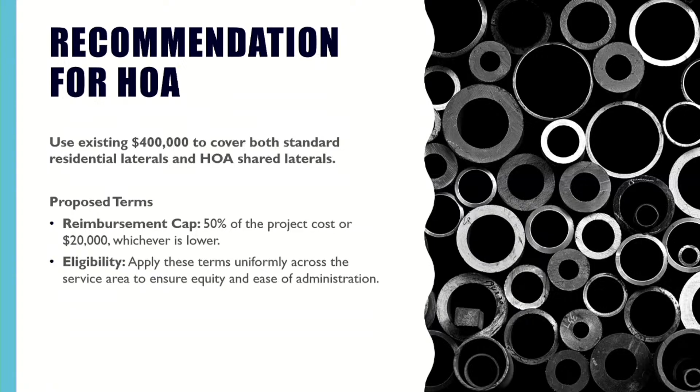That is our recommendation, and we look forward to hearing any feedback you have. Okay, thank you so much for the presentation.

Director Antila: I do have questions. First of all, on HOAs, there are two different types - one owned privately by a land developer, and one that's on city property. Are you drawing a distinction between the two? Response: We don't have a distinction identified for the different HOAs. If they submit an application to us, we'll review it, but this usually accommodates the property owner, so we'll have to see if there is a different path that needs to be taken. Right now we just identify it as shared laterals HOA, but we don't have a differentiating response.

Just pointing that out because the city of Richmond has a street sweeping program, and they don't street sweep in privately owned HOAs. Oh, okay, so I was just curious about that.

Is there contact information for people interested in the PIPES program? Yes, it's the same PIPES information for residential, but I forgot the phone number. We have Armando Hodge, our engineer in planning and support services, who also manages the PIPES program. Armando, can you share the contact information? He does a lot of work on the PIPES program, so you should probably talk to him as well.

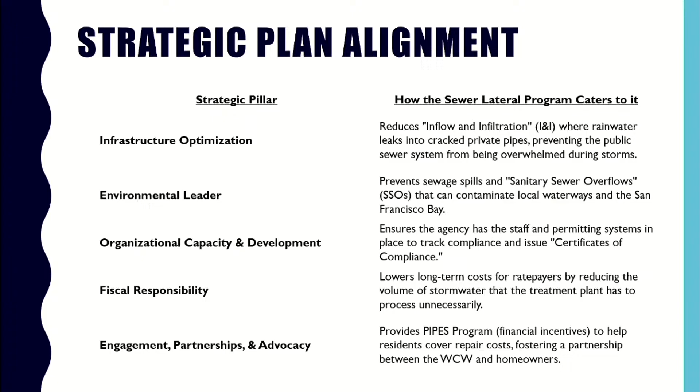Actually, yes, just so we can see the breakdown again. Happy Cinco de Mayo, by the way. That's right, Cinco de Mayo.

And in order to get that rebate, does it have to be done by a licensed contractor? I mean, a homeowner can't do it themselves - they send that information to us and we'll reimburse. Okay, yep.

One second, Angela, Armando. I thought we had in our PIPES program where the homeowner could do some of the work themselves. Is that in there? Oh, sorry. Okay, I thought it was licensed, sorry.

Yeah, owner-builder, but I think they have different requirements - they have to get quotes from contractors still in order to justify the price.

There we go. Thank you. Thank you for that clarification. All right.

I'm here for another. Okay, next item, please. Public comment? So, yes, before we move on, we need to ask if there's public comment on item 2, the PIPES program update. If anyone has any comments, please approach the podium or raise your hand in Zoom. Seeing none, we can move on to item 3. All right, thank you, next item.

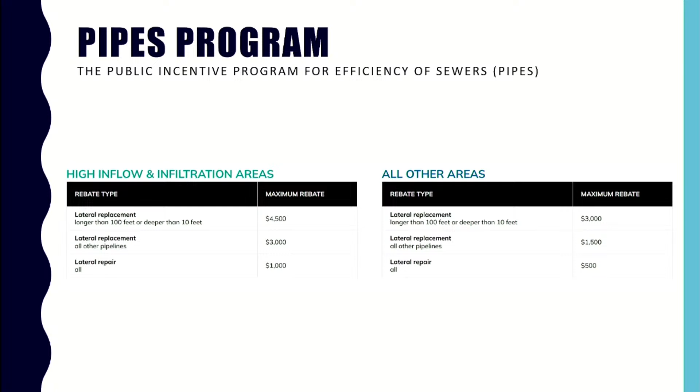Angela Andrews will give us a brief presentation on the AQPI initiative. You get a gold star if you could say it 5 times fast. I hope you begin with a nice, detailed explanation on what this is. It's going to, give me 1 second. Okay. While you're doing that, I'm gonna get some water, but you can continue. Okay, I'll listen while you do that.

Do I need to do anything with the remote? Oh. I could talk about it, won't be as fun.

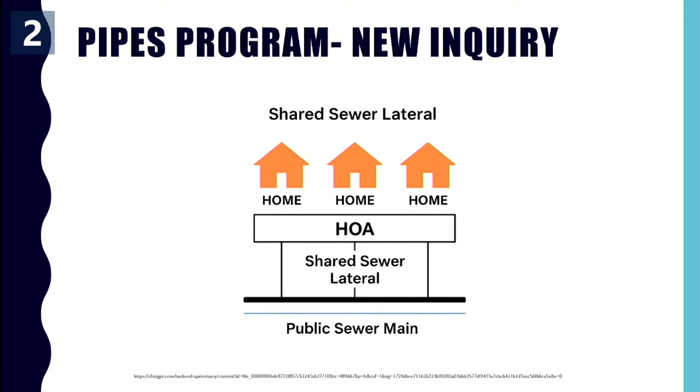Maybe you have to take this to the full board in order to vote to agree to having that. Okay, HOAs, we are ready. Here's a presentation to the board.

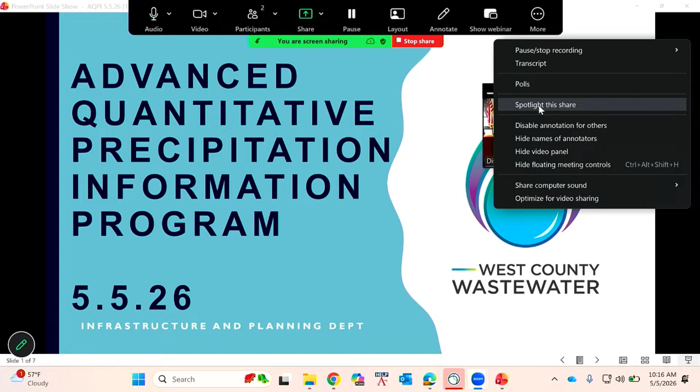So today I'm presenting on the Advanced Quantitative Precipitation Information Program. It's about weather, you guys. That's a more complicated way of saying it. We're trying to predict the weather.

So the AQPI program uses a network of radars that are throughout the region, and we're trying to have a better estimate or measure for rainfall. So this will help during the strong rainstorms that we're seeing so we can prepare better for emergencies.

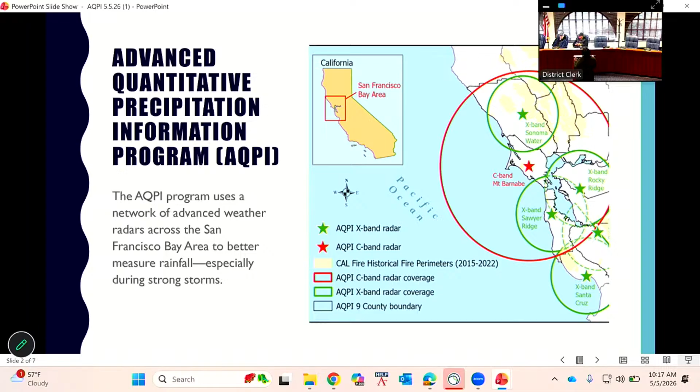And this fills in the gap for traditional weather coverage. It gives us more timely data, and then it helps us for flood readiness and emergency response.

This is a collaboration throughout the region, and it's one of the reasons we wanted to participate. It's part of our strategic goal of being more collaborative with regional partners and neighboring agencies. There's a team of local governments participating, led by the Sonoma area, with emergency managers throughout the region looking at this data. It also includes water agencies such as ourselves, and different communities throughout the Bay Area will also be participating in the AQPI project, with more partners continuing to be added.

I can give you a breakdown of who they are. It's being led by Sonoma County Water Agency, with a lot of support from East Bay Dischargers Authority. Sonoma, SFPUC, and Santa Clara Water are putting in the lion's share of getting this program off the ground. Us participating actually helps reimburse Sonoma for some of the initial costs they had to contribute to start the project. But you can see there's a lot of folks interested in getting this information.

Hold on, let me do the first one. Is it working now? Still no? There we go. Oh, there it goes. Okay.

So some recent milestones that we've been able to reach. We've completed our remaining shutdowns at the headworks. Some testing - if you go up there now, you'll see a lot of construction around the headworks area. Essentially what we're doing now is we're going to start installing bypass piping.

So Andrew talks a lot about some of the auxiliary projects that come from this project that will benefit staff and organization in the future, and this is an example of that, right? Due to the cost of bypassing that system, Aptera is going to build us a bypass that we'll be able to keep forever. This is a pretty substantial piece of infrastructure they're building there, using some really innovative techniques and equipment that, for us, would probably be 30-40% more in cost if we were to do this on our own. So we're actually saving money by getting additional infrastructure that we normally would not be able to do, or even thought about doing at the beginning of this project.

So essentially, they're building a bypass. That bypass system will allow us to bypass our entire grit system into our wet well. So in the future, when our staff are doing maintenance of our headworks, of our new grit system that we're installing, they're able to do it without being in confined space. They're able to do it in a more safe manner, and we're able to maintain our system during that time.

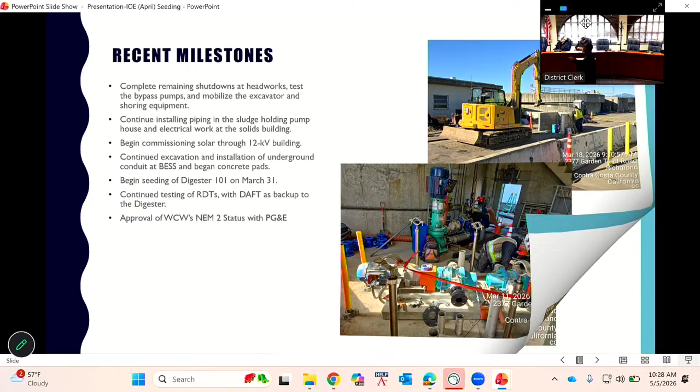Okay, startup continues for the RDT. I told you we had some issues. They're performing as expected, but there's some backups inside the line, clogs. We think we found out that it was the manufacturer of the polymer, not really the equipment itself.

So we're running a new polymer. I want to thank Andre at the plant. He did a great job working with the last company, and we decided we just need to part ways and go with a different company. We were able to do that, and so far, so good, and actually it's a little cheaper polymer.

The backup, we installed a backup line as a change to the project in case the RDT did fail. That is in place to feed the new sludge inside of the digesters in case we have an issue with RDT. So we gave ourselves a little security blanket in case we have an issue, so we can continue to seed our digesters and get them commissioned.

The 7-day test, this equipment will be accepted after a 7-day test. We're going to wait on that until we start seeding digester number 2 to start the 7-day test, and we're just going to use the seeding of digester number 2 also as a test to make sure the RDT is functioning correctly. I want to thank maintenance and operations for their help with that.

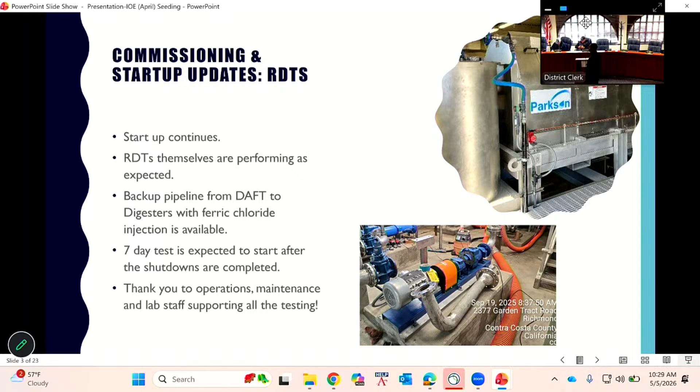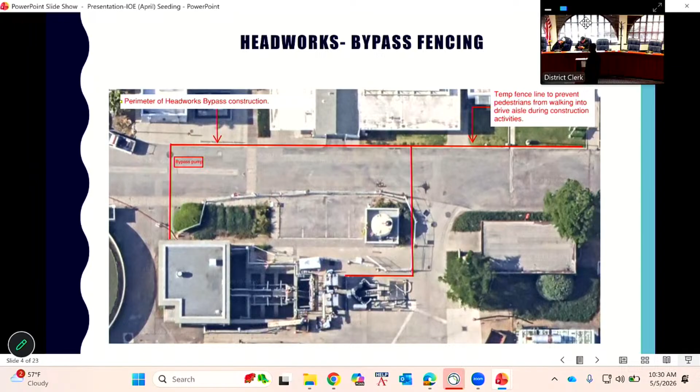Okay, let me go here. And then commissioning schedule, seeding 101, like I said there. 102, we just discussed that today and agreed today that Monday will be the day we start seeding digester 102. Centrifuge will follow that. So we're looking at late May, early June for centrifuges to be done.

At that point, we'll be at a Class B biosolids, and then at that point it'd be West County's responsibility to transport the sludge out off the site. We're currently looking at probably mid-June for that to be the case. Until then, Optera is still paying for the transportation of sludge off-site.

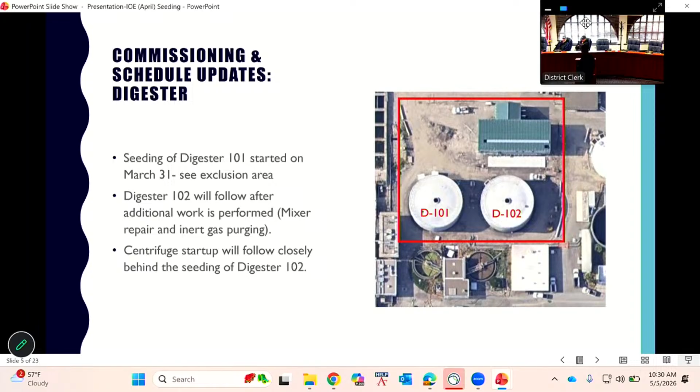I thought these were some good slides to add here, just to talk to you guys about digester methodology and what we're doing as we're seeding the digesters. I'm going to go pretty quick about it, but the primary purpose of the seed - we have an anaerobic digester. We add in biology, which is the main driver inside that will create the gas we will use to create electricity here at West County.

What we've been able to do is seed our digesters from the City of Richmond using their spent sludge, and then we're adding it to hot water inside of our digesters here at West County. So we're getting something that's like 1 or 1.2% solid, and we add it to pure water, right? So it takes time. So far it took about 30 days or so for us to get to a point where we're comfortable with the digester, because we're diluting it with water.

We have to do that because we have a new type of mixer, right? It's kind of a plunging type of mixer, and we have to keep a water line inside of the digester. So we have to keep it with water, and then we're adding the sludge in on the backside.

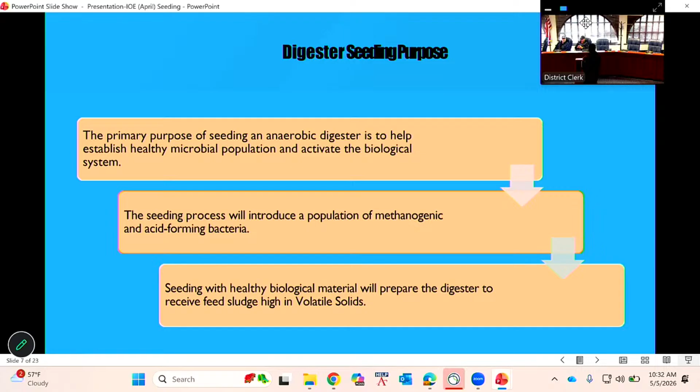We added roughly 300 and some odd thousand gallons of water and sludge from City of Richmond over a 5 or 6 day period. There was one period inside of the 30 days where we were very scared about the pH balance inside of the digester, so we added some more seed to support the biology inside of the digester. But other than that, it's been running very well. We're above a 6.8 pH, which is where we want to be, between 6.8 and 7 pH level inside of our digester.

Let me go to the slide here. Our alkalinity goal is to be between 2,500 and 3,500. Right now we're about 2,100 and going up rapidly, like 100 milligrams per liter a day over the last week. That's why we're comfortable with starting seeding next week for digester number 2. Our concentration is on the lower end, about 80, and that's fine. Not too bad of a number, but we're within range, and that's the most important thing right now. As the digester matures, that will grow up over time.

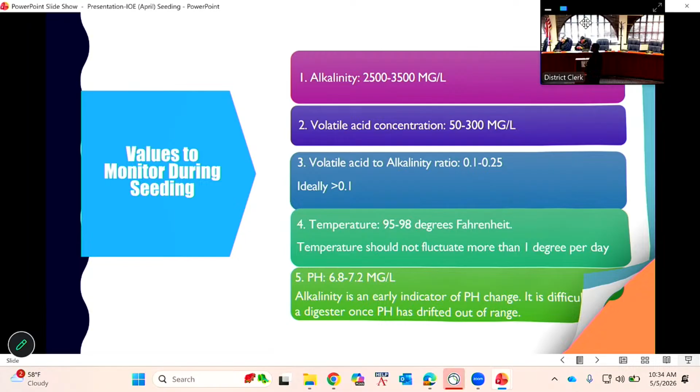On adding chemistry, like I said earlier, we've been increasing the rate. We started at a 15% rate, which is basically 15% of the sludge that we create—I'm saying sludge, that's primary sludge, plus secondary solids that we have coming from the plant. 15 to 20% of that is what we were feeding into the digester over about a 2-week period. We then increased it. Thursday is our increase day, as we call it.

We increased it 10% because we were scared about the pH that I told you about earlier, and last week we increased it by 20%. So now we're getting about 57%, 60% of the entire plant sludge being added to our new digester. This Thursday we're going to increase it another 20% as long as all the numbers remain how they are.

That will hopefully increase the alkalinity. The more food is in there, the more activity you'll have of the biology, the more biology will be able to grow, and hopefully that stuff will be created. We have seen a correlation of our increases into some of the numbers, especially when it comes to alkalinity, our pH, and things of that nature. So that's been very, very inviting.

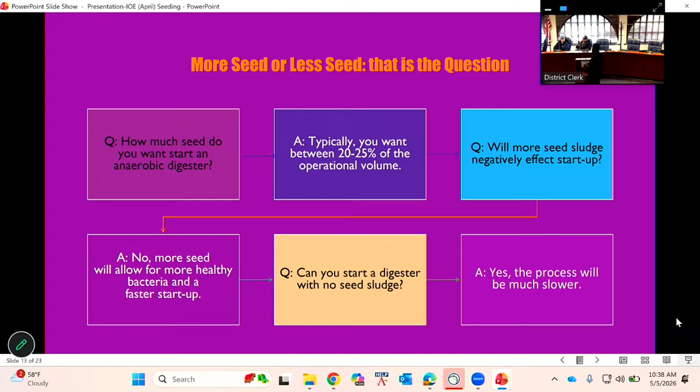Question—we nitrogen purge, so we had the nitrogen purge for multiple aspects of this project. The digesters have to be purged with nitrogen. As I told you before, above the water line we need to have all the oxygen vacated so we can avoid explosion. When you have oxygen, you have fire, you have explosion. So the nitrogen goes in to kick that out. We monitor the oxygen levels inside the gas piping, the flare, and the digester daily, making sure it's below 0.2% oxygen in any of those aspects of the gas system to avoid explosion.

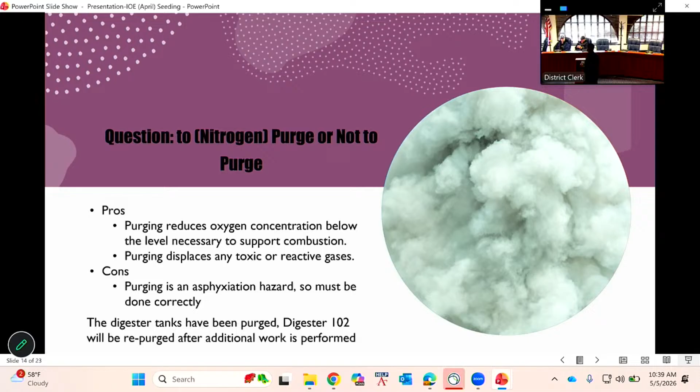Right now, starting Tuesday, we're going to gas purge the gas cleaning skid because we're going to start making our own gas and we've got to start testing the cogen. So we're going to start making power here shortly—that's our anticipation.

I'll go through this quickly. We want to get it online. We were hoping to kickstart the seeding by filling 150,000 gallons of sludge, but we ended up doing more than that—we saw it was more helpful. We want to get Synagro off site, not just for us, but we're a partner with Opterra, and they're paying that cost now, which is pretty substantial. So we're trying to get this online as soon as possible.

Our feeding into the digester has been at 10%—last week we did 12. Right now we're at about 22,000 gallons of sludge coming in daily, and we produce roughly 45,000 gallons a day. We're pretty excited that we're getting so much of our sludge in there. I have a lot of this data on the sludge in case you want to look back and know what we're doing, but I'll go through it quickly.

For monitor startup, as I told you earlier, pH and volatile solids are very important to us—our solids content is very important. That's because at a certain point we cannot discharge to our headworks. Right now we're below 1% solids, discharging into our headworks. So if I have a tank with 750,000 gallons and add 25,000 gallons a day into it, that 25,000 gallons has to go somewhere, and it goes through the overflow. When we get into regular operation, that's going to go to our centrifuges, to tank 103, to our centrifuge, and then be sent out.

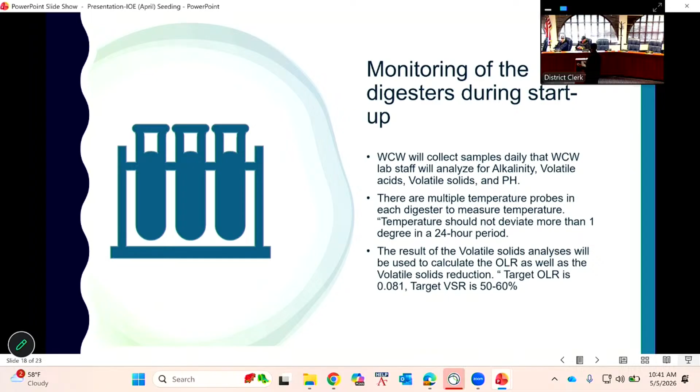More or less, why are we doing this, when are we doing this? This kind of dance will be something plant staff have to do forever moving forward. When are they gonna give seed? When are they not gonna do seed? When Richmond seeds come in, all this kind of coordination is gonna be there, but that's something we did before. That was part of the process in general with the digester. You monitor those things and figure out how much seed, when you're wasting, that's all part of the process. But that is something we did before, and that's something we're going to do now.

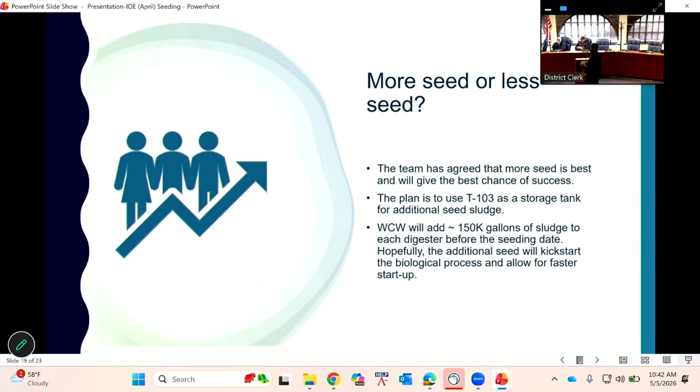I think now they have more technical inputs like monitoring, SCADA, and different things that they didn't have before. So it's not more of keeping something on a piece of paper and guessing, I'm going to do it this way today. They're going to have data and information every morning they'll be able to get and say we're going to do this or that. And that's another benefit of this project.

Does the plan include inert gas? Yes, I talked about that, the headspace, and what we're doing for that. I put this on here because I want you guys to really understand the purging process. If we do have an issue in the future, this digester has to be taken down once every two years or so so they can be cleaned. This purging process will have to be done again. So this is a process of cleaning the digester and also putting it back on.

So I just want to let you know, because if you guys are on the board and they come to you like, hey, we have to get a contract for purging, you understand what we're doing and why we need it. We had an issue with the digester, or some kind of issue where we have to clean it earlier, or some annual cleaning of the digester or the gas cleaning skid. You have to use nitrogen to purge that, so it's for safety purposes for everyone.

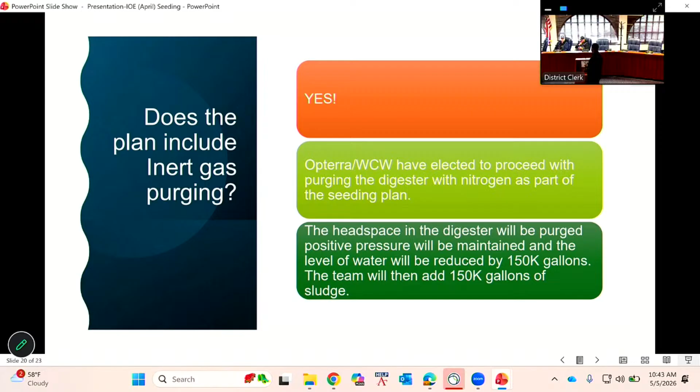And then contributions of HDR. I know there was some talk about HDR. I just want to talk about what they've done. They've had a lot of contribution to us. I don't think we would be in this position without their aid and assistance. HDR was not the lead project manager, outside project manager at the beginning of this project. Carollo was.

Financially, that became a challenge. I approached HDR, and I feel like they've more than stepped up to the plate. They've done an amazing job so far. I think the cost that we've given them over time is way lower. I think we gave them one change order over this time, and this project was originally supposed to be three years, and we were double the time. So we've been able to extend the amount of money we gave them over a long period of time and get a very high level of service. In my 20 years, they're the best contractor I've ever worked with. I can say that, no doubt.

I'd like to put parentheses around that last statement, because it's important for our ratepayers to understand that we're being proactive in saving money. Absolutely, absolutely. And making them that lead was about thinking about cost, because to be quite honest, I don't think we would have gotten the same level with the same amount of money if we stayed the path we were at.

Internal benefits, they're helping train WCW staff. That's something that wasn't even part of the original project, but their staff is so knowledgeable that our staff have been able to walk around. Just something like a mass balance calculation - we had staff that did not know how to do that, and they do now, because they've been able to be with HDR, talk to them, see how they work, see why it's important. And now they're doing it, asking me questions about the solids numbers and things of that nature.